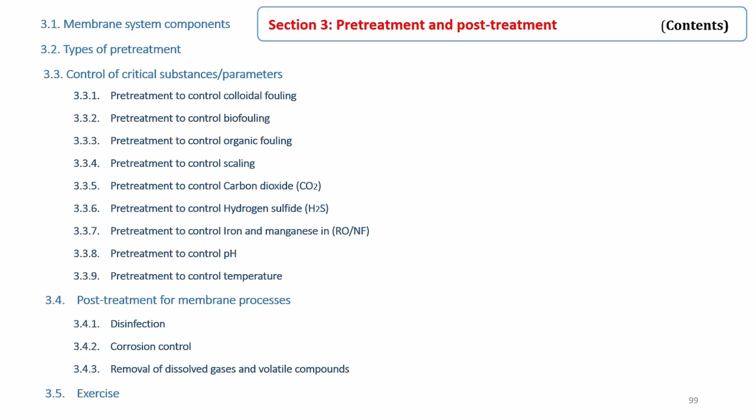In the next lecture, post-treatment for membrane processes will also be discussed, such as disinfection, corrosion control, and removal of dissolved gases and volatile compounds. In the end, exercises for selection of pretreatment and post-treatment in membrane processes are presented.

Membrane system components. A schematic of a typical membrane system has been presented. Components in a typical system include pretreatment, membrane units, product post-treatment, and concentrate post-treatment if required.

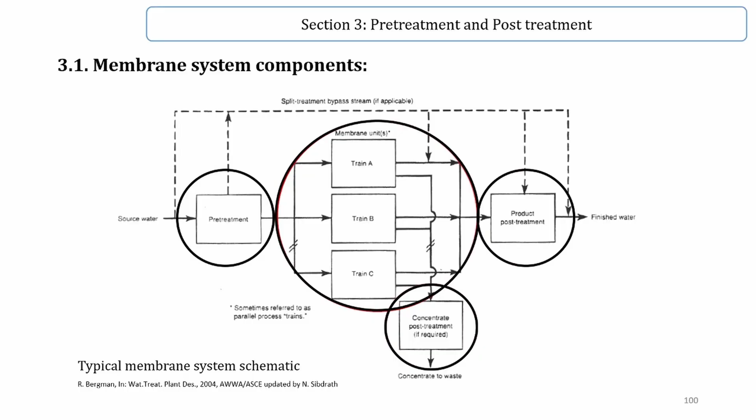First, I begin with pretreatment for membrane processes. Objectives and requirements: the primary objective of pretreatment is to make feedwater compatible with the membrane. Pretreatment is required to increase the efficiency and life expectancy of membrane elements by minimizing fouling, scaling, and degradation of the membrane.

Prior to feed pretreatment, the characteristics of the feed need to be analyzed in terms of various physicochemical parameters such as pH, suspended and dissolved solids, total hardness, dissolved oxygen, conductivity, specific solute concentration, chemical oxygen demand, biological oxygen demand, and etc., to ascertain the selection of one or more suitable pretreatment methods.

Another important trend towards reducing the load on the membrane for water treatment is the integration of two or more pretreatment strategies to improve the performance of ultrafiltration, nanofiltration, and reverse osmosis.

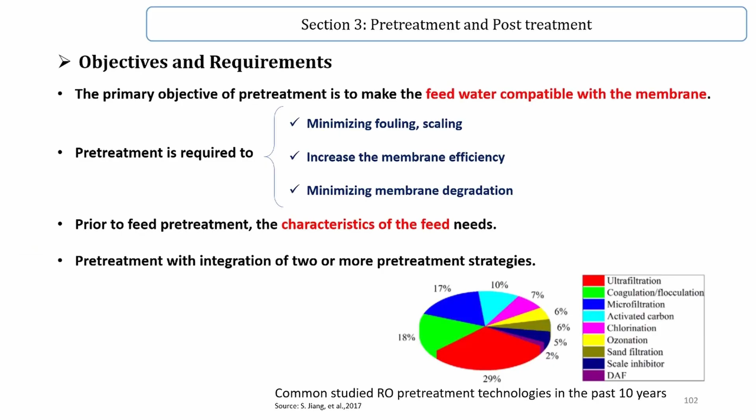You can see in this figure common studied reverse osmosis pretreatment technologies in the past 10 years. As shown, ultrafiltration, coagulation, flocculation, and microfiltration are the three technologies that have been most studied by researchers as reverse osmosis pretreatment methods.

In fact, ultrafiltration and microfiltration as pretreatment of reverse osmosis is gaining more and more popularity in recent years. Coagulation and flocculation has long been used as a pretreatment method for not only reverse osmosis but nanofiltration and other technologies as well.

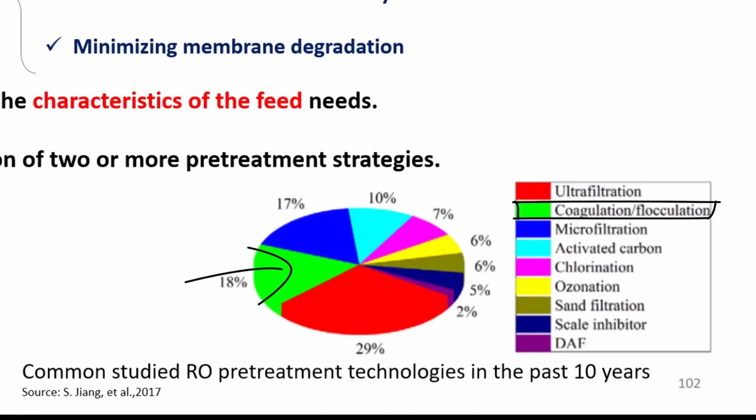Before discussion on the types of pretreatment, let's look at the treatment processes. In this slide, a list of treatment processes that are applied for wastewater treatment is presented.

Physical processes such as clarification, screening, aeration, filtration, flotation, degasification, and equalization. Chemical processes such as chlorination, ozonation, neutralization, coagulation, adsorption, ion exchange, and advanced oxidation process. Biological treatment processes such as activated sludge system, trickling filtration, ponds and lagoons, aerobic and anaerobic processes.

The physical-chemical treatment processes are also applied in waterworks. Of course, there are some differences in the applications and operation.

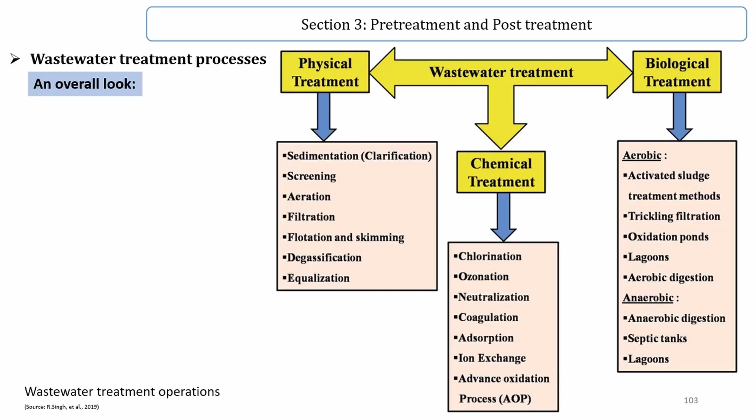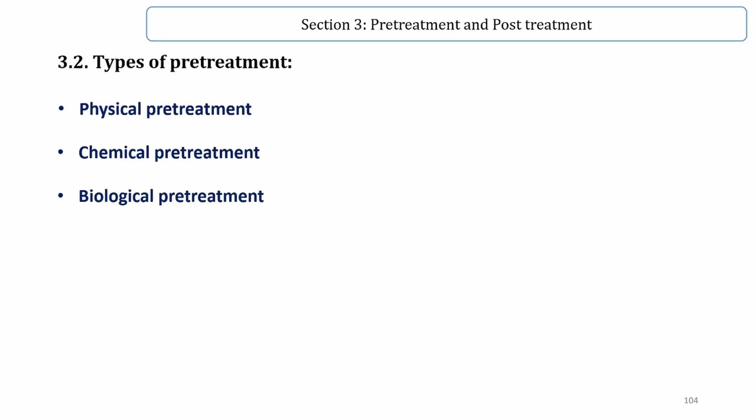Types of pretreatment. Pretreatments, depending on the application and feed characteristics, are classified into physical, chemical, and biological pretreatment.

Physical pretreatment. Solids not only can easily lead to blockages in membranes, but can also block plant components such as pipes, valves, and fittings. In multi-stage water treatment plants, the first stage is usually to remove solids by physical pretreatments for this reason. This can be implemented according to three principles: gravity, buoyancy, and particle size.

The easiest way to separate solids is by sedimentation. In the sedimentation tank, solid particles fall to the bottom due to gravity and can then easily be removed with sludge scrapers. Effective sedimentation requires laminar flow conditions in the sedimentation tank.

Typically, sedimentation in a water treatment plant is preceded by coagulation and flocculation, but before the filtration system. In a wastewater treatment plant, it's mainly used as primary and secondary clarification.

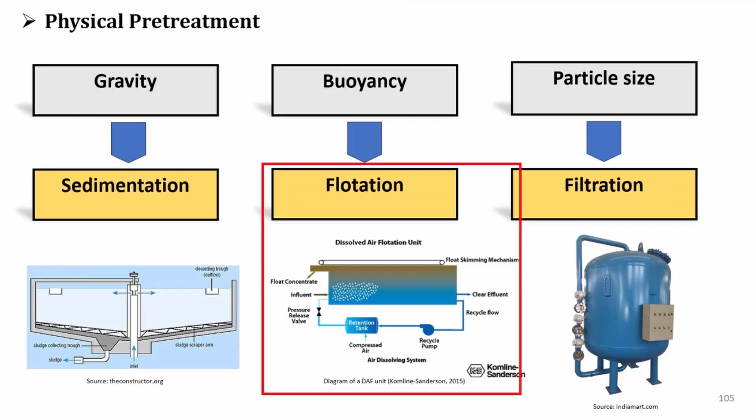Solids with low settling velocities cannot be effectively separated by sedimentation because this would require very large sedimentation tanks. In this case, flotation processes provide a sensible alternative. The basic principle is still the same: gas bubbles attach themselves to the bottom of the solids and drive the solids to the surface.

Once there, the floated solids can be removed with special scrapers. Flotation processes differ mainly in the way the gas bubbles are produced. In water treatment, the most commonly used method is dissolved air flotation, or DAF.

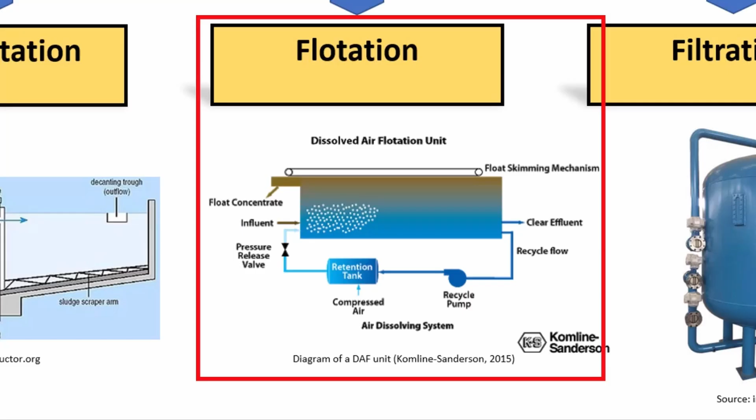In this process, a partial flow of the treated water is saturated with air under pressure. The air-saturated water is then passed back to the inlet region of the flotation tank as circulation. An expansion valve is located just before the inlet to the flotation tank, which causes the water to suddenly re-expand to atmospheric pressure. This expansion causes the dissolved air to form fine bubbles. The filtration mechanism is the same as membrane filtration, as I have already explained in the previous section.

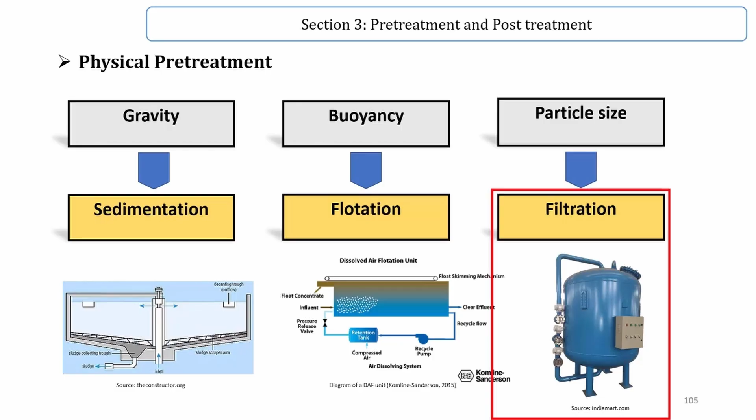These chemicals can be categorized into coagulants, flocculants, scale inhibitors, acid, and oxidizing agents.

Coagulants and flocculants are mainly utilized to enhance the settlement of suspended solids in the feedwater to achieve higher removal rates. The addition of scale inhibitor is to increase the solubility of dissolved salts such as calcium carbonate and magnesium sulfate, to reduce the extent of scaling.

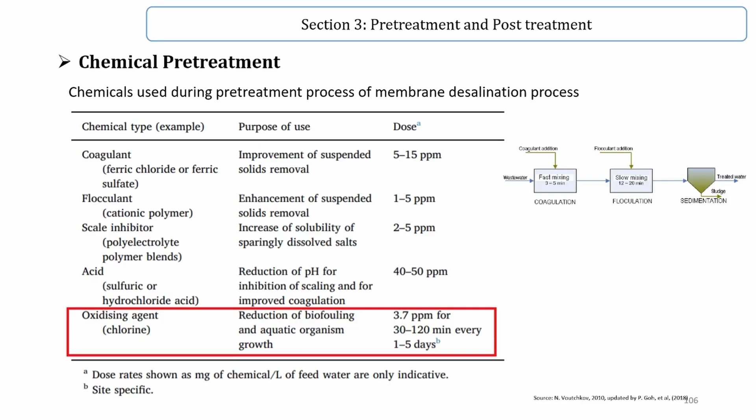Oxidizing agents such as chlorine are used to eliminate the growth of aquatic organisms, aiming to reduce biofouling on the membrane surface. It must be noted that some chemicals are required to be used continuously in order to maintain the performance of the reverse osmosis membrane by minimizing fouling.

Conventional treatment methods in general are well accepted in reverse osmosis desalination plants for several decades, but they are not without drawbacks when used in reverse osmosis pretreatment.

Studies have indicated that conventional treatment requires high chemical usage, large footprint, large manpower, and high operating cost. With respect to treated water quality, conventional pretreatment that consists of media and cartridge filtration does not provide a definite barrier to suspended particles and colloids.

Thus, in order to address these issues, microporous ultrafiltration membrane as a pretreatment method becomes the prime option in many new seawater reverse osmosis plants installed worldwide.

Of course, it has to be noted that although ultrafiltration membrane is very effective to remove particles, colloids, dissolved organics, and microorganisms, the presence of high concentration of dissolved organics in the water source can easily cause fouling due to surface adsorption.

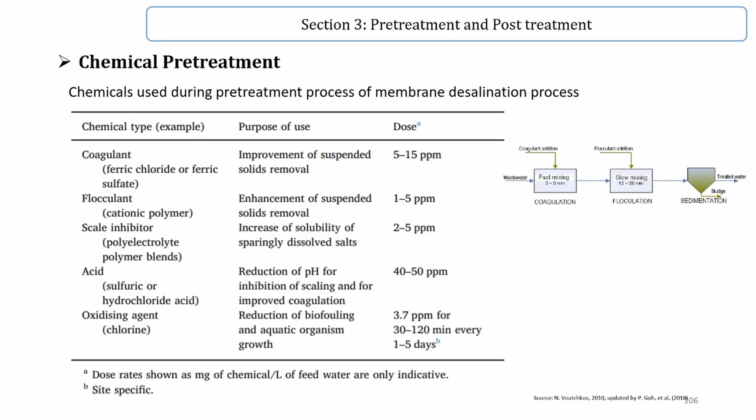Biological pretreatment such as anaerobic reactors, activated sludge systems, and aerobic biofilm reactors are the most common processes in wastewater treatment, and can also be applied as pretreatment for membrane bioreactors. You can study these processes in concerned references such as books on biological wastewater treatment.

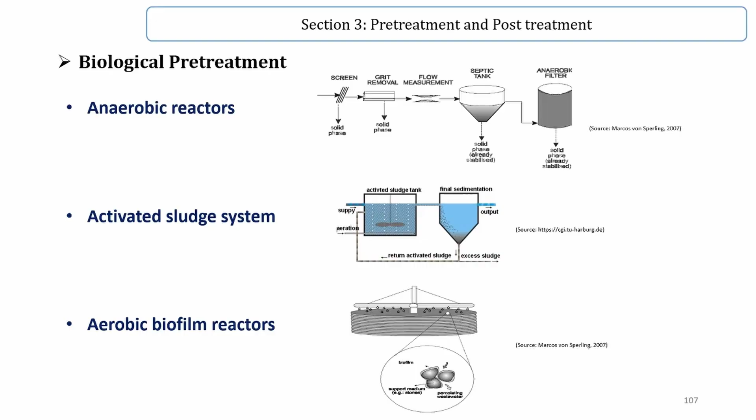In this part, I am going to recommend the most common solutions for controlling the main substances and parameters that cause problems in membranes, as we have already discussed in the previous section.

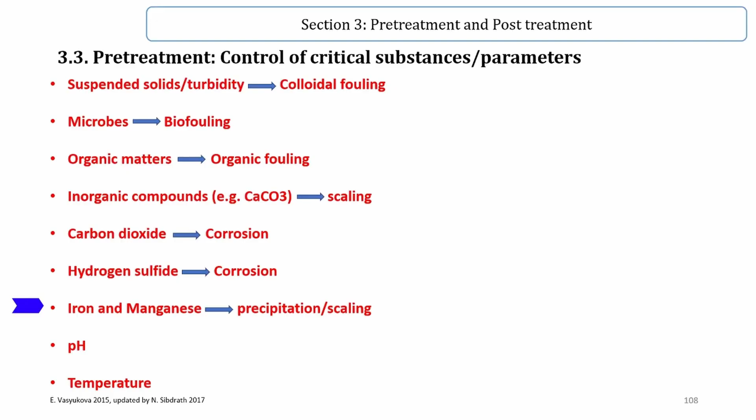These substances and parameters include suspended solids which cause colloidal fouling, microbes which cause biofouling, organic matters which cause organic fouling, inorganic compounds such as calcium carbonate which cause scaling, carbon dioxide and hydrogen sulfide which cause corrosion, iron and manganese which cause precipitation and scaling, as well as pH and temperature.

Pretreatment to control colloidal fouling. As you know, colloids which cause turbidity in water and wastewater form a cake on the membrane surface as colloidal fouling.

Typically this depends on the membrane material. The limitation of suspended solids concentration or turbidity is recommended by manufacturers, but generally a range between 1 to less than 0.2 NTU is recommended for the prevention of colloidal fouling.

Turbidity is measured in NTU, that is nephelometric turbidity units. The instrument used for measuring that is called a nephelometer or turbidimeter.

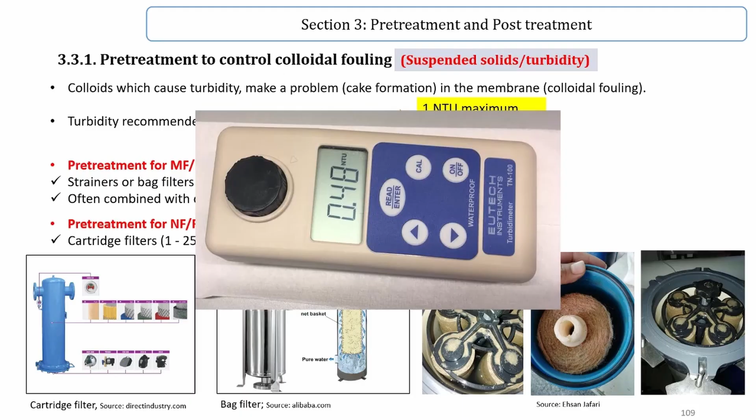If you are going to select a pretreatment for membrane filtration including microfiltration and ultrafiltration, strainers or bag filters with a range of 100 to 500 micrometers are recommended.

Suspended matter, depending on size, can be removed using bag filters, but not colloids. For this reason, in high concentration of colloids, it is combined with coagulation and clarification, because colloids have a negative surface charge, and using coagulants such as aluminum sulfate, flocs are formed and can be removed through clarification and rapid sand filtration.

For nanofiltration and reverse osmosis, cartridge filters with a size range between 1 to 25 micrometers, and for groundwater 5 micrometers, are recommended.

I have taken these photos to show you the pretreatment filters after some months of operation. But it has to be noted that these filters have to be cleaned using washing or replaced to prevent damage to the membrane.

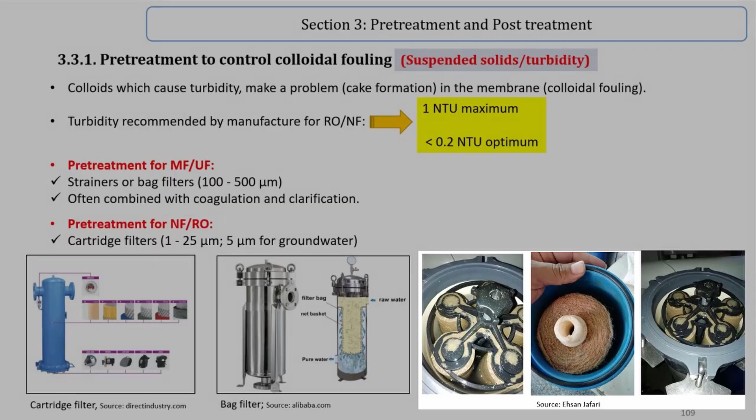Pretreatment to control biofouling. Pretreatment methods to control biofouling depend on source water quality, type of membrane system, and membrane tolerance to disinfectants such as chlorine.

Source water has to be considered because, for example, in groundwater you have no or less microbial fouling, but surface water systems require continuous control.

In fact, as I have already said, the origin of biofouling is microorganisms such as microbes. Microorganisms can be removed using disinfectants. For this reason, if you have biofouling potential in the water source, you have to select a membrane material that has a high tolerance to disinfectants such as chlorine.

As a review, if you remember this table, the most common materials for reverse osmosis and nanofiltration are cellulose acetate and TFC. Cellulose acetate can tolerate up to 1 ppm chlorine, and TFC has a bad tolerance to chlorine, and this is the main drawback of these membranes.

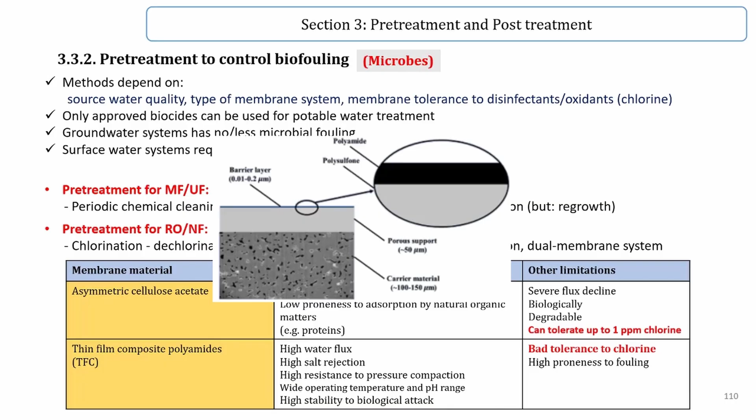The reason for the TFC limitation is that the thin or top layer of this membrane is a polyamide material, and as you can see in this table, polyamide has a very low oxidant tolerance. On the other hand, the best material in case of biofouling potential are inorganics, which have a very high tolerance to disinfectants.

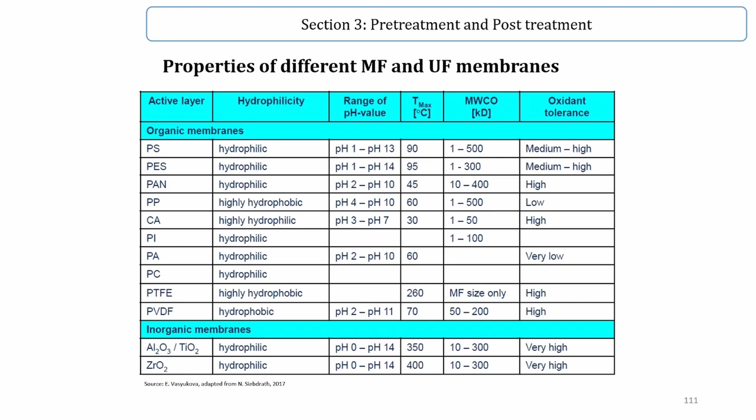Some pretreatment methods for microfiltration and ultrafiltration include periodic chemical cleaning, backwashing, chlorine, or UV disinfection. For reverse osmosis and nanofiltration: chlorination, dechlorination such as sodium disulfite or sulfur dioxide to remove chlorine residual prior to the membrane, UV disinfection, and dual membrane systems.

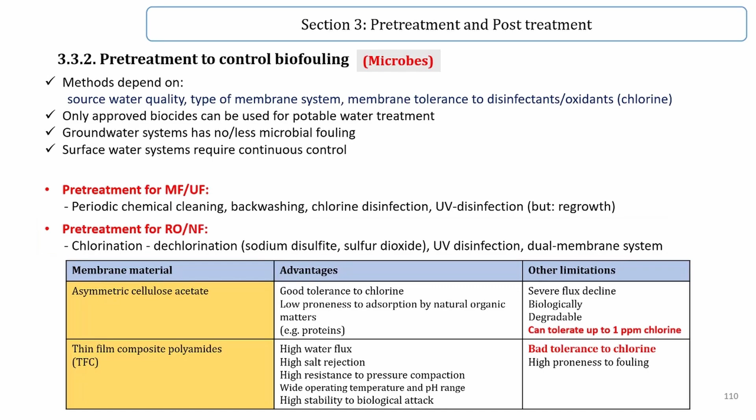Pretreatment to control organic fouling: the origin of organic fouling is natural organic matter and synthetic organics. The main source of natural organic matter is in surface waters. Pretreatment for reverse osmosis and nanofiltration is used to remove natural organic matter and synthetic organics, but there is no direct correlation between total organic carbon and fouling. However, a concentration bigger than 10 mg per liter total organic carbon is problematic.

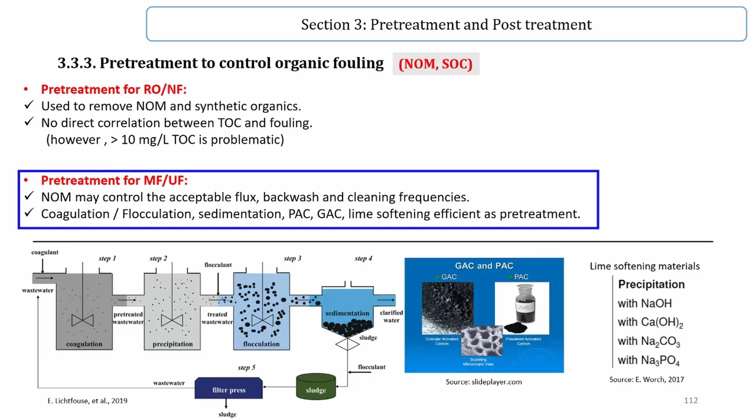For microfiltration and ultrafiltration, backwash and cleaning frequencies apply. In parallel, coagulation, flocculation, sedimentation, powder activated carbon or granular activated carbon, and lime softening are efficient as pretreatment. In this figure, as a conventional method to remove natural organic matter as well as colloids and suspended matters, in the first step, after injection of the coagulant on the pipe, a stirrer is used, and mixing and contact time increase to form the flocs.

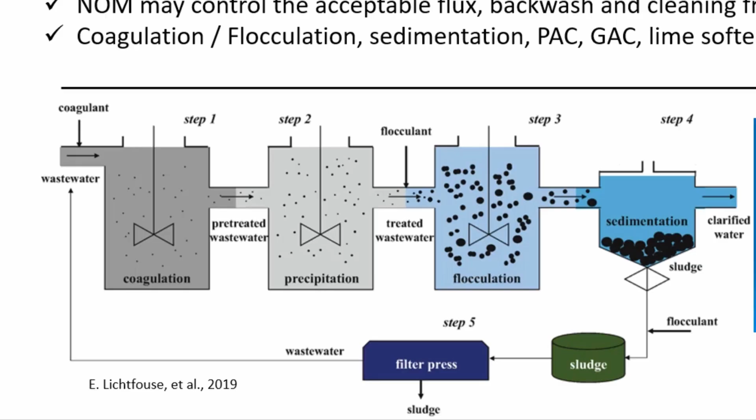In the second step, a part of the flocs is settled on the bottom. Adsorption of polymers as a flocculant and bridging, called flocculation, and precipitation with entrapping of particles is done. Then, in the clarification step, the formed flocs can be settled.

Pretreatment to control scaling: as we have already discussed, the salts that most commonly form scale are calcium carbonate, calcium sulfate, strontium sulfate, barium sulfate, and silica complexes such as silicon dioxide. Calcium carbonate, which can exist in the form of calcium and bicarbonate ions in industrial water, groundwater, and seawater, is the most common type of alkaline-based scalant, particularly in reverse osmosis membranes.

It can be reduced through softening and dealkalization processes in combination with sand filtration or microfiltration, which I am going to explain more in the next slides.

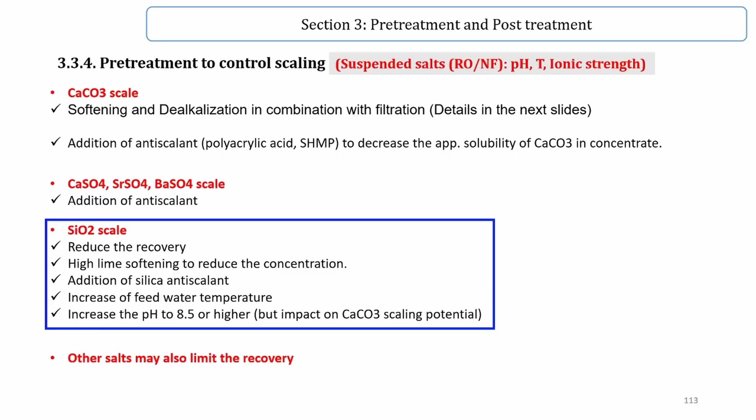Calcium sulfate, strontium sulfate, and barium sulfate scaling can be reduced using antiscalant. To reduce silicon dioxide scaling, it is recommended to reduce recovery, which we will discuss in the next section. High lime softening as a precipitation process can reduce the concentration. Addition of silica antiscalant, increase of feedwater temperature, and pH can contribute to reducing scaling.

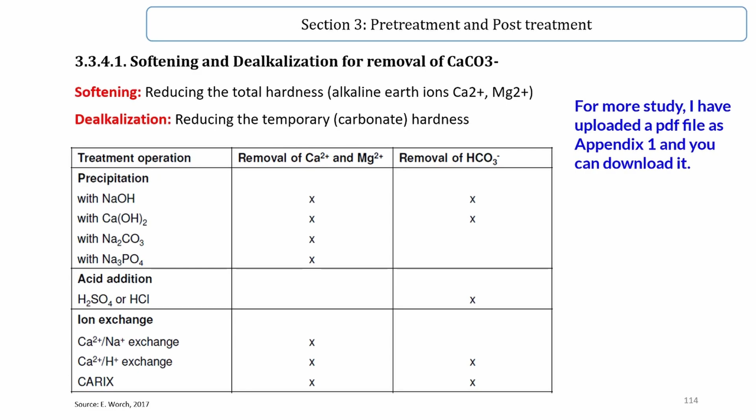Softening and dealkalization for removal of calcium carbonate: reducing the total hardness, or alkaline earth ions calcium and magnesium, is softening, and reducing the temporary or carbonate hardness is dealkalization. As you can see in this table, the most relevant processes as pretreatment, especially for reverse osmosis systems, include precipitation with sodium hydroxide and calcium hydroxide, acid addition, and ion exchange. In this lecture, I'll explain sodium hydroxide and calcium hydroxide, and for more study, I have uploaded a PDF file as Appendix 1, which you can download from the website.

One of the effects in this process is that in the presence of iron and manganese, the deironing and demanganization can be done simultaneously.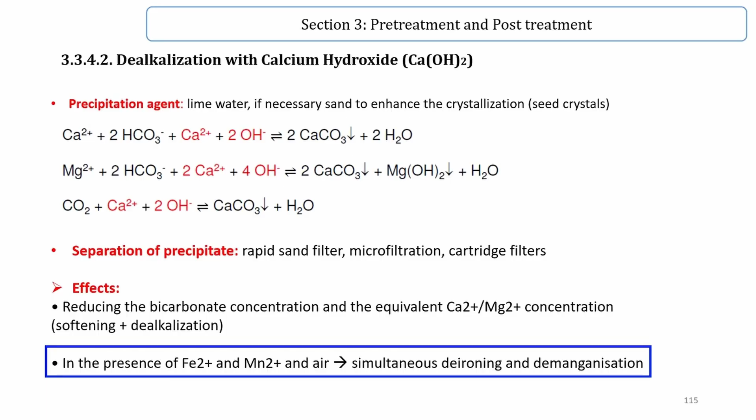Dealkalization with sodium hydroxide: as you can see in this equilibrium, the product of dealkalization with sodium hydroxide is calcium carbonate, sodium, and water. In comparison with calcium hydroxide, at the same hardness reduction, only less than 50% reduction of bicarbonate can be achieved, because with calcium hydroxide, in the removal of 1 mole calcium, 2 moles of bicarbonate can be removed, but with sodium hydroxide, only 1 mole of bicarbonate is removed.

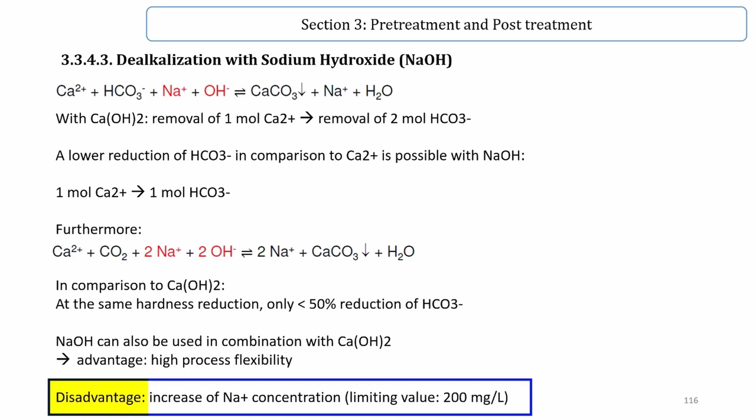It can also be used in combination with calcium hydroxide. This process is not recommended for the reverse osmosis system due to an increase in sodium concentration, which is one of the main drawbacks.

Pretreatment to control carbon dioxide. Once the concentration of carbon dioxide is high, especially in groundwater or wastewater treatment, because of its corrosive characteristic, it has to be removed or reduced using deacidification process.

Deacidification is removal of carbonic acid in order to bring the water into the state of calco-carbonic equilibrium, together with an increase of pH, as you can see in this equilibrium. In groundwater, as a result of biodegradation of organic material in the soil, the concentration of dissolved carbon dioxide in seepage and groundwater is often higher than the equilibrium concentration related to the calco-carbonic equilibrium.

If there is no calcium carbonate available for the reaction with carbon dioxide, or if the contact time between water and carbonate is too short, the seepage water and groundwater cannot reach the state of calco-carbonic equilibrium. As a consequence, the water contains a carbon dioxide excess, which gives the water an aggressive or corrosive character. Therefore, the carbon dioxide excess has to be removed from drinking water before distribution.

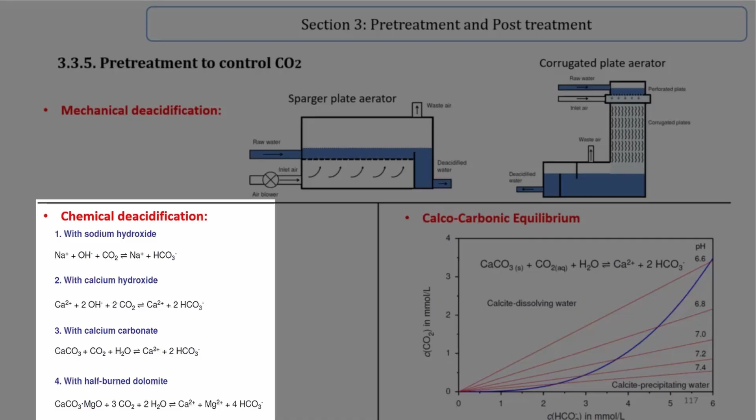Pretreatment to control hydrogen sulfide. If the purpose of treatment is for drinking water, hydrogen sulfide has to be removed. Some of the problems of hydrogen sulfide include unpleasant odor, corrosion problems on some metals, tarnish or discolor problems, stain laundry and bathroom fixtures yellow or black, discolor beverages, and alter the appearance and taste of cooked foods.

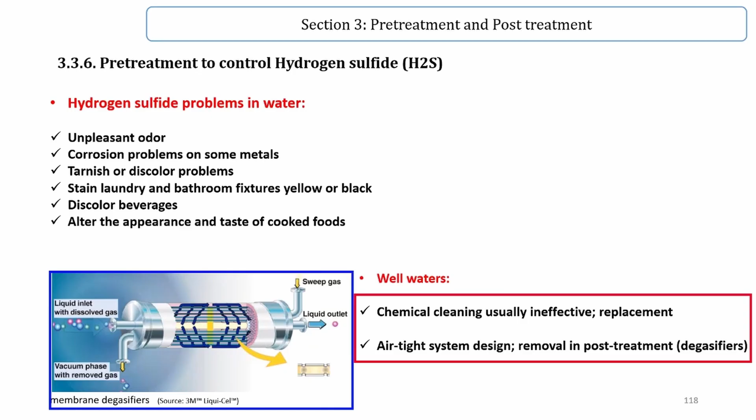Usually, chemical cleaning is ineffective to remove it. As a physical cleaning method, membrane degasifiers can be applied, as you can see in this figure, or some other methods.

Pretreatment to control iron and manganese in reverse osmosis and nanofiltration. Actually, if reduced water which contains iron and manganese ions comes in contact with oxygen, intensively colored flocs of manganese oxide and iron hydroxide will be formed.

Some problems caused by dissolved iron and manganese include problems during drinking water distribution due to blockage of pipes; colored and particle-containing water is not accepted by consumers; and water is not suitable for many industrial and other commercial purposes.

Pretreatments for iron and manganese removal. To remove iron and manganese, at first it has to be oxidized with air, chlorine, or other oxidants. Then, with granular media filtration, microfiltration, or ultrafiltration, it can be filtered. The oxidation equilibrium has been presented for iron and manganese.

Depending on the application and concentration, methods such as cation ion exchange softeners, acid addition, and inhibitors can be applied. In this reclamation plant recommended for industrial reuse, you can see de-ironing and demanganization in the chain.

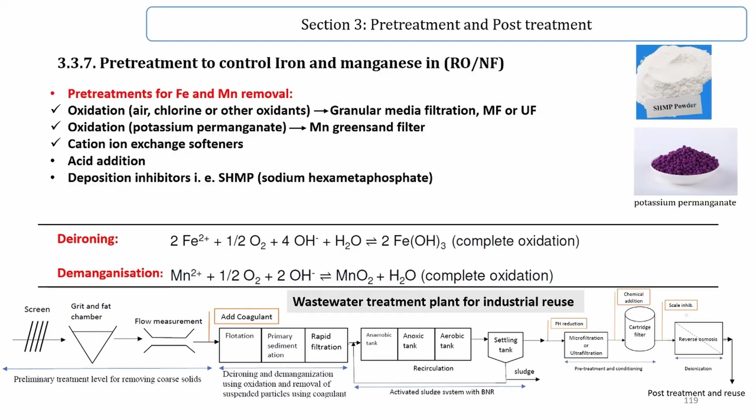Pretreatment to control pH. To control pH as pretreatment, both the pH range of membrane material and desired pH in order to reduce fouling and scaling have to be considered. As we have already discussed the membrane properties in this table, in the selection of membrane material, the range of pH value has to be considered.

There are some limitations for organic membranes, but inorganics can act from 0 to 14 with no limitation. For example, in reverse osmosis and nanofiltration, polyamide as the top layer of TFC membrane can act in the range of 4 to 10, but cellulose acetate between 4 to 6.5.

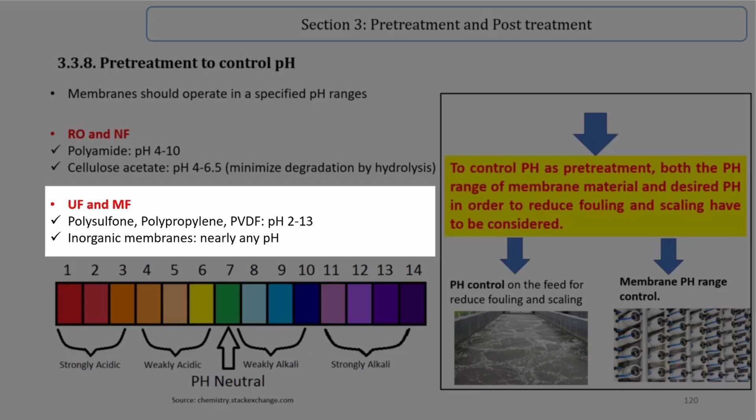In the selection of the membrane material, you must consider these limitations as we have already discussed. In microfiltration and ultrafiltration, organic materials such as polysulfone, polypropylene, and PVDF can act in the pH range between 2 to 13, but inorganic membranes can act in nearly any pH.

Pretreatment to control temperature. Temperature has influence on altering membrane material characteristics, change of solubility, and permeate.

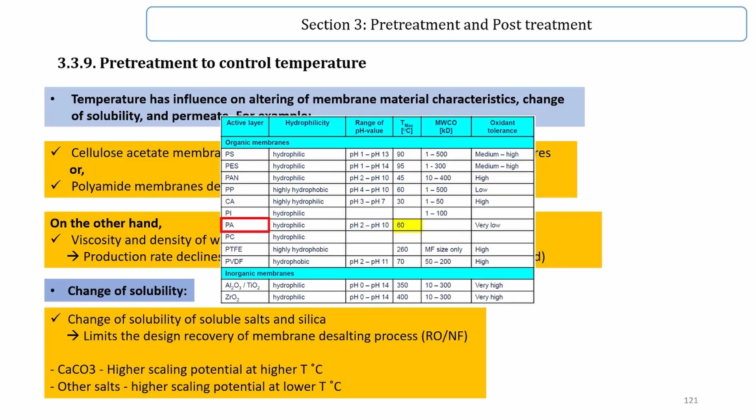In this table, you can see the maximum temperature of membrane materials. For example, cellulose acetate membranes deteriorate from hydrolysis with higher temperatures, or polyamide membranes deteriorate from compaction with higher temperatures. On the other hand, viscosity and density of water increases at lower temperature. As a consequence, production rate declines.

Change of solubility also has some influences. For example, change of solubility of soluble salts and silica results in limitations of the design recovery of membrane desalting process. Or at higher temperature, scaling potential based on calcium carbonate increases, but at lower temperature, higher scaling potential for other salts can take place.